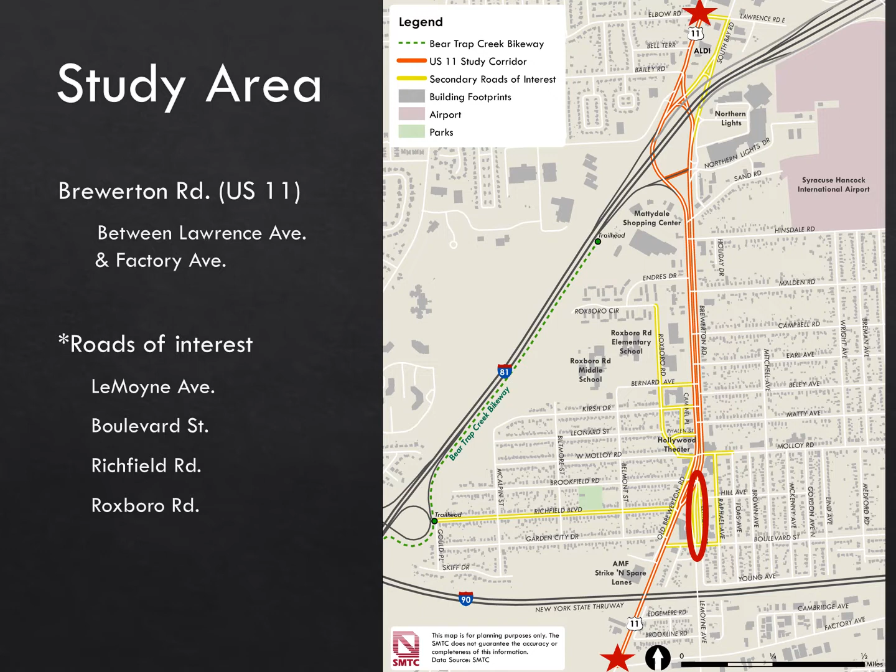The study area includes Brewerton Road from Lawrence Ave, north of I-81, to Factory Ave, south of the Thruway. Three agencies own roads within the study area. US 11 is owned by the New York State Department of Transportation. The state also owns I-81. A major road of interest is LeMoyne Ave, which is owned by the county DOT. The county also owns a few other roads in the area, and most neighborhood roads are owned by the Town of Salina.

The study provides an opportunity for the community and the agencies who own the roads to come together and envision big picture options about what the long-term future could hold. Due to ongoing public health concerns, we've opted to conduct virtual sessions for all meetings and presentations. SMTC's role is to orchestrate this effort and make a planning level determination if the ideas are reasonable to consider as big picture options, or if they should be ruled out due to some impracticality, which we refer to as a fatal flaw assessment. Ideas that pass the initial fatal flaw assessment are presented for your feedback.

Given the high-level nature of the study, many ideas may require additional vetting at an engineering level that is beyond the scope of this study. If the community chose to advance any of the ideas in the coming years, specific design and mitigation details would need to be worked out as part of subsequent design, engineering, and environmental review efforts.

For over a year, SMTC has engaged with the Study Advisory Committee. As listed, the committee is comprised of town, county, and state representatives who have authority over the various roadways. Agencies such as Centro and SOCPA also participate. Together, we have studied the US 11 corridor and have developed a few big picture ideas that we would like to share with you for your feedback. Draft concept plan options are presented later in this presentation. These ideas represent a long-term vision only. There's no proposal to build or construct anything.

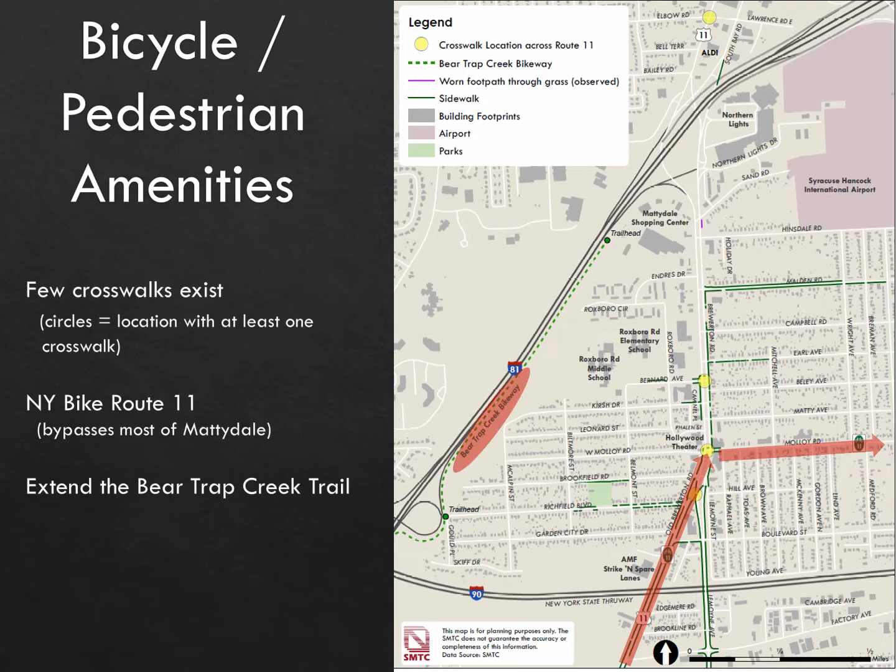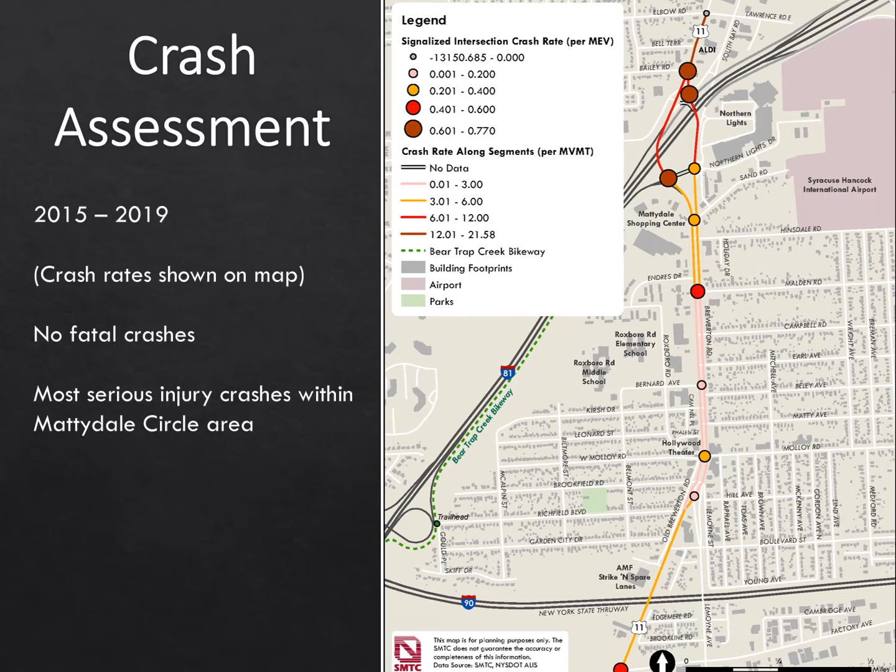along the side streets. Many businesses along Brewerton Road have closed and remained vacant throughout the years. This presents opportunities to redevelop properties or reoccupy existing buildings.

We also considered how increased vacancy rates along the corridor may have impacted traffic volumes. The map shows the most current annual average daily traffic volumes and the number of lanes by direction of travel. The current volume of around 21,000 represents a 27% decrease in volume during a recent 8-year period. This begs the question, how many travel lanes would be necessary if underutilized areas developed to their maximum potential?

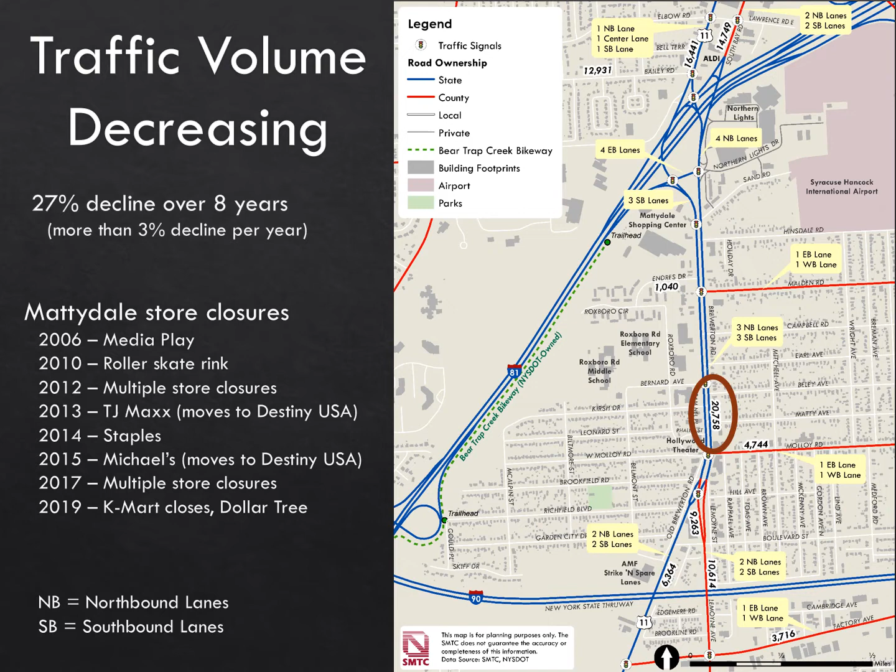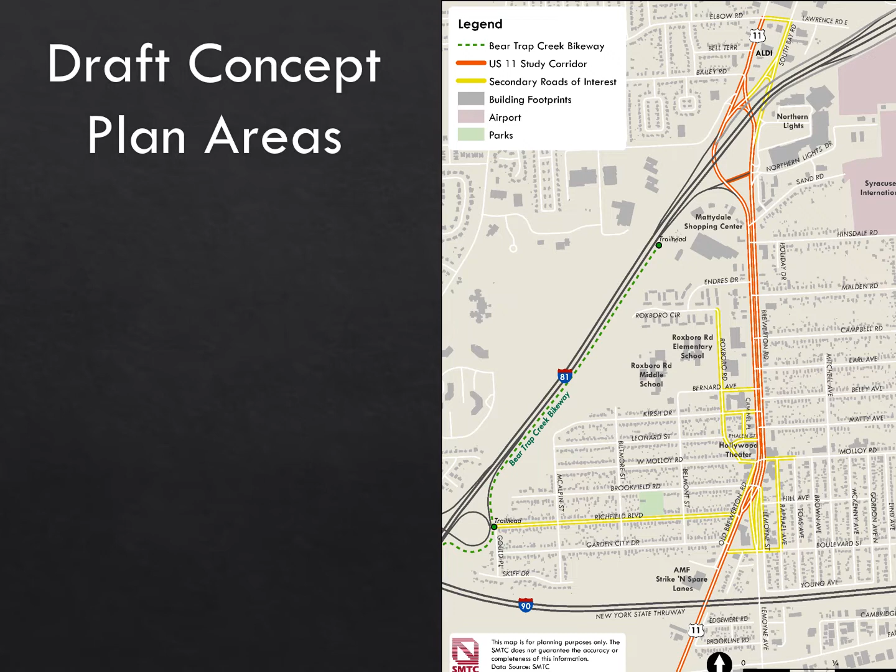The next few slides cover the fatal flaw assessment. For 3 underutilized areas, we calculated the maximum development potential based on a hypothetical zone change to R5 mixed use, which supports the envisioned town center development patterns. The 3 areas include the Mattydale Shopping Center, the former skating rink property, and the area near LeMoyne Ave and Molloy Road, which we refer to as Mattydale Commons.

We developed draft concept plans to illustrate what these areas could look like if built to their maximum potential under an R5 zone. The 4th underutilized area includes Northern Lights. We assumed that the building footprint would remain the same and that all vacant space would be fully reoccupied. We developed a concept plan that illustrates potential access and circulation improvements to the overall plaza design.

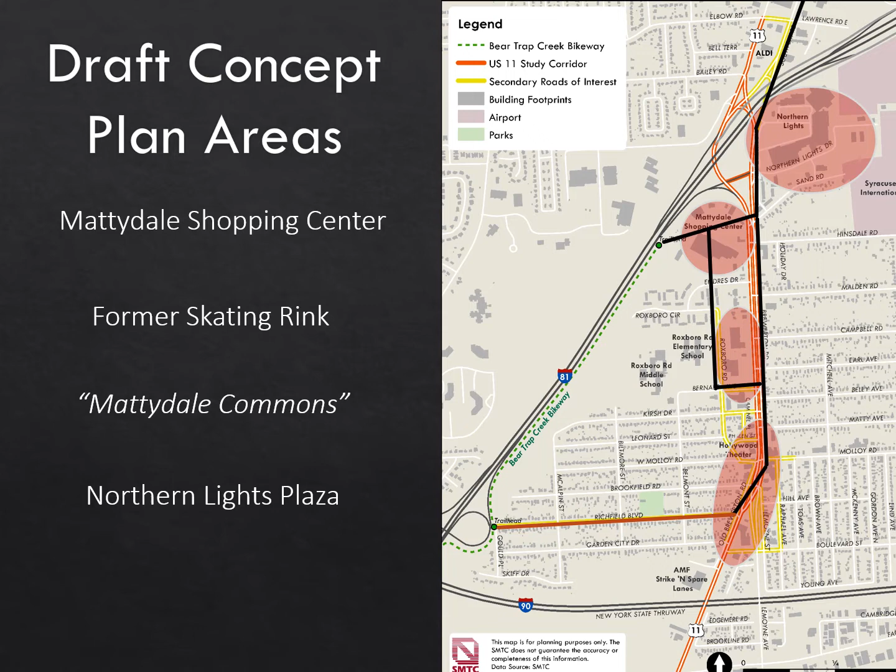Lastly, for context, we show here in black potential network extension options for the Bear Trap Creek Trail along the east side of US 11 as well as along the western side of Roxboro Road. Extending a shared use pathway along the east side of US 11 would likely be contingent on reducing a travel lane. Richfield Boulevard, in red, connects to the existing trailhead. Shared lane markings or bike lanes could be considered. More study is required to determine the feasibility for any of these ideas.

Calculating the maximum development potential for these areas, if the zoning was updated to an R5 mixed use, provides the inputs needed to run our fatal flaw assessment and develop concept plan examples. Maximum development calculations include about 160 new households and about 350,000 square feet of commercial space. This equates to about 1,000 new jobs.

Next, we use our travel demand model for our fatal flaw assessment. The model is calibrated for our region. It provides information for current conditions and future conditions for the year 2050. To assess development impacts on the road system, the model requires 2 additional inputs, the number of new jobs and the number of new households. The model can then forecast the percent change in traffic volume and the VC ratio. This information will tell us how much of the roadway's capacity is likely to be utilized in the future.

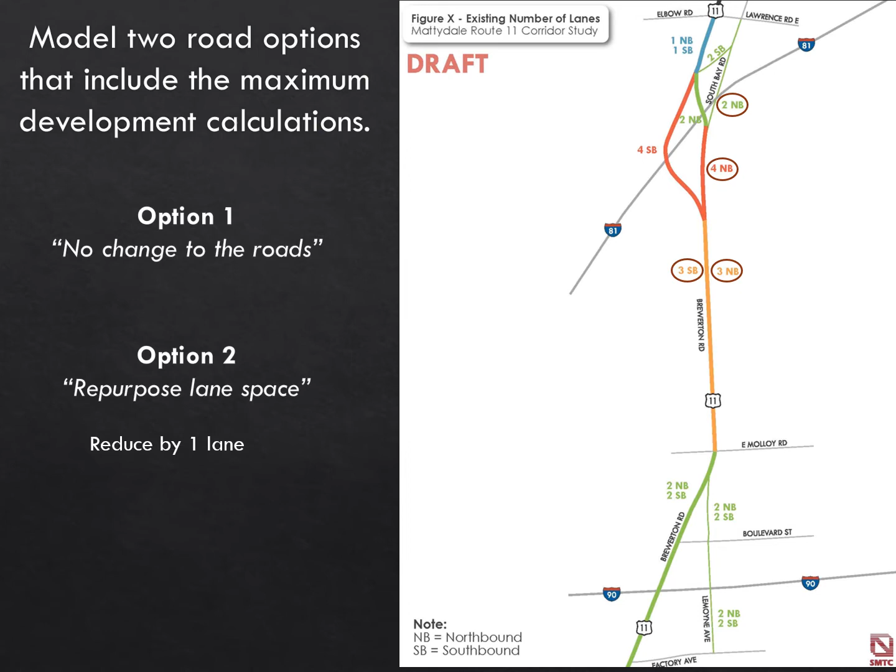The model can also assess big picture changes to the road system. We assess 2 road options that include the maximum development potential. The first road option is to keep all roads the same. This would maintain the same number of travel lanes as shown on the map. The second option is to reduce US 11 by 1 lane in each direction for these circled locations, and to redirect LeMoyne Ave to US 11 via Boulevard Street. This would open the area as indicated by the X for new development.

We included the maximum development calculations and wanted to know how much traffic would increase by the year 2050 for the evening peak hour under both road options. If US 11 and LeMoyne remain the same under option 1, future 2050 results indicate that traffic will increase 5 to 10% along both roads, and that less than 33% of the capacity will be used along both roads.

Next, we compared the future results for option 1 against the future results for option 2. Again, option 2 repurposes one lane in each direction for other enhancements along US 11 and redirects LeMoyne to US 11 via Boulevard Street to open land for development. Under option 2, traffic volumes decrease along US 11 and LeMoyne. For US 11, traffic decreases by 10 to 20% and less than 35% of US 11's capacity is used. For LeMoyne, south of Boulevard Street, traffic decreases as much as 50% and less than 20% of LeMoyne's capacity is used.

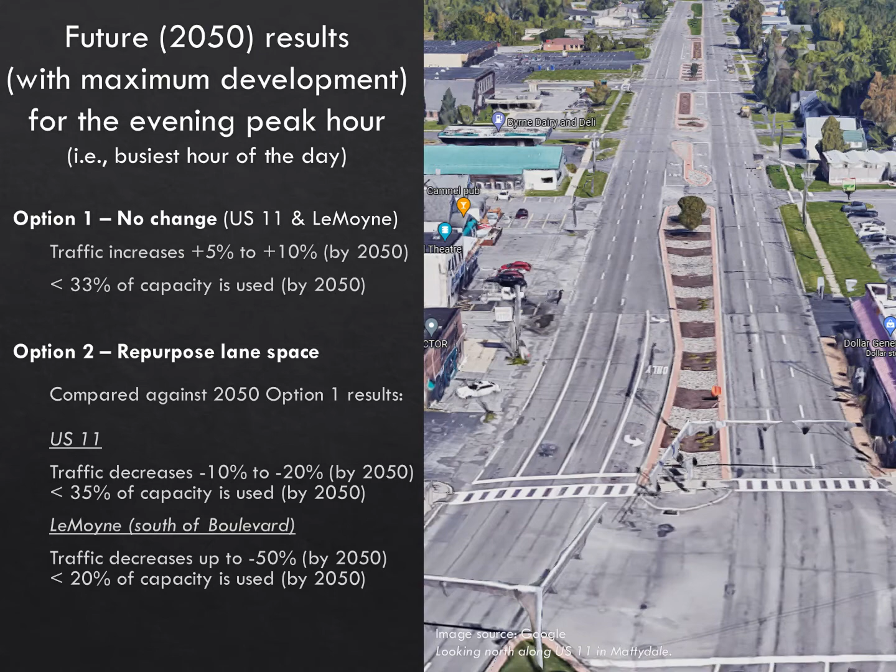As mentioned, under option 2, the model shows traffic volumes decreasing along US 11 and LeMoyne Ave within the study area compared to option 1. Interestingly, the model indicates that the decrease will include more than just the new traffic associated with the envisioned development. This suggests that there is a lot of cut-through traffic that currently travels along both roads, which does not originate or stop within Mattydale. Some traffic may find it more desirable to take another route if lanes along US 11 and LeMoyne are repurposed for other enhancements.

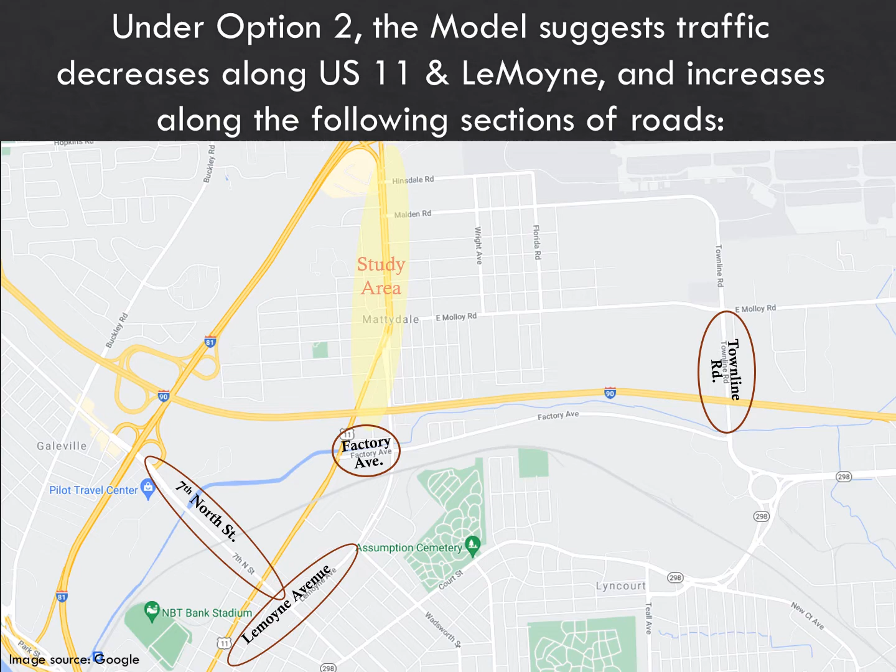The model results indicate that, even at maximum development, there's likely to be significant roadway capacity available under both road scenarios. This is a high-level, corridor-wide fatal flaw assessment. An additional study at an engineering level is required to address specific details. However, as a planning-level study, the model's results suggest that it is not unreasonable to consider both road scenarios as potential options, and that maximizing development potential is not dependent on keeping the same number of lanes.

The 4 concept plans shown in the remaining slides provide big picture ideas of what things could look like and how lane space could be repurposed for other mobility enhancements, such as on-street parking, access management, bikeway and sidewalk options, extending the Bear Trap Creek Trail, and improved access to bus stops. Although some lane enhancements could occur if the number of lanes remain the same, more options may exist if some lane space becomes available for other uses. Therefore, the concepts show these additional enhancements under option 2, the repurposed lane space scenario.

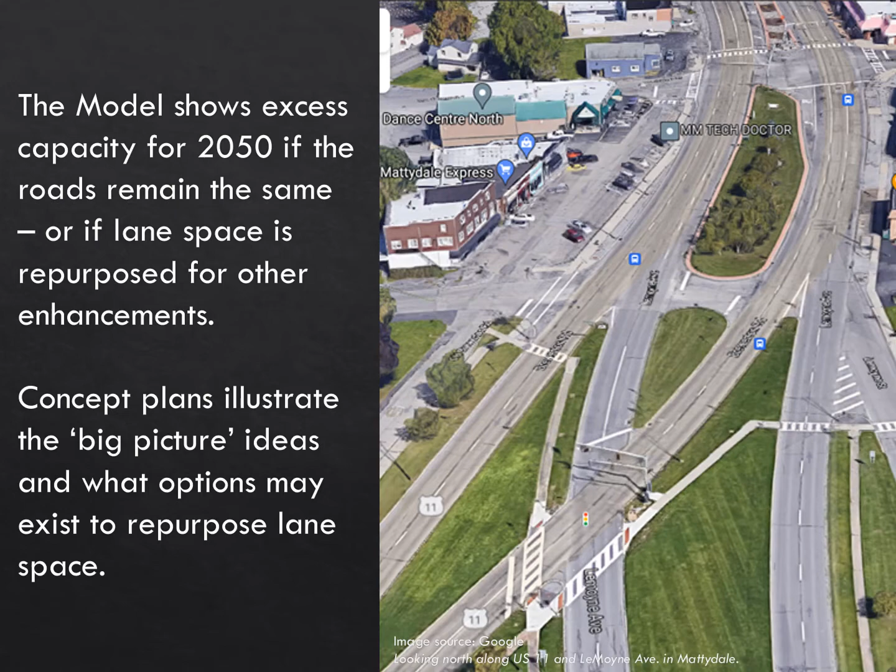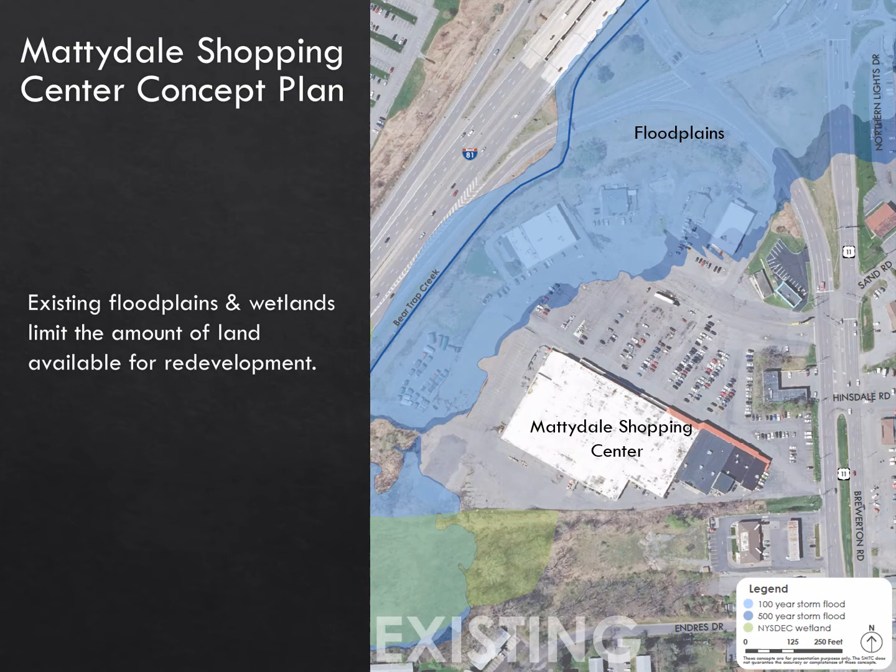As shown, some locations near the Mattydale Shopping Center are constrained by floodplains. Although the shopping center could remain the same, the town asked us to also re-envision any unconstrained floodplain areas as a town center development. The big picture idea about to be shown is a long-term concept that reflects the town's expressed vision. It's not a proposed site plan for development. As envisioned, a zone change to R5 mixed use could allow 90 new residential units and about 22,000 square feet of commercial space. Undeveloped floodplain areas could be restored to natural conditions and serve as a vegetated buffer.

The layout is a traditional 4-corner Main Street theme. The 3 dark-colored buildings have ground floor commercial and upper floor residential. The 7 light-colored buildings are apartments. On-street parking is indicated by the blue lines. Parking lots are located behind the buildings with driveways opposite each other at mid-block points for safety. A bus pull-off area along US 11 has sidewalks that connect to the site.

Sidewalks are shown as white dotted lines throughout the site and along US 11. Stop bar and crosswalk locations are shown. The Bear Trap Creek Trail is shown extended to US 11 and to Endres Drive. A bike and pedestrian side path is shown along the eastern side of US 11. We'd like to know, do you like this big picture idea? Are there features that you would add or remove? Although it's not shown, one idea to enhance safety along US 11 could be to prevent left turns into and out of Hinsdale Road. How do you feel about this idea?

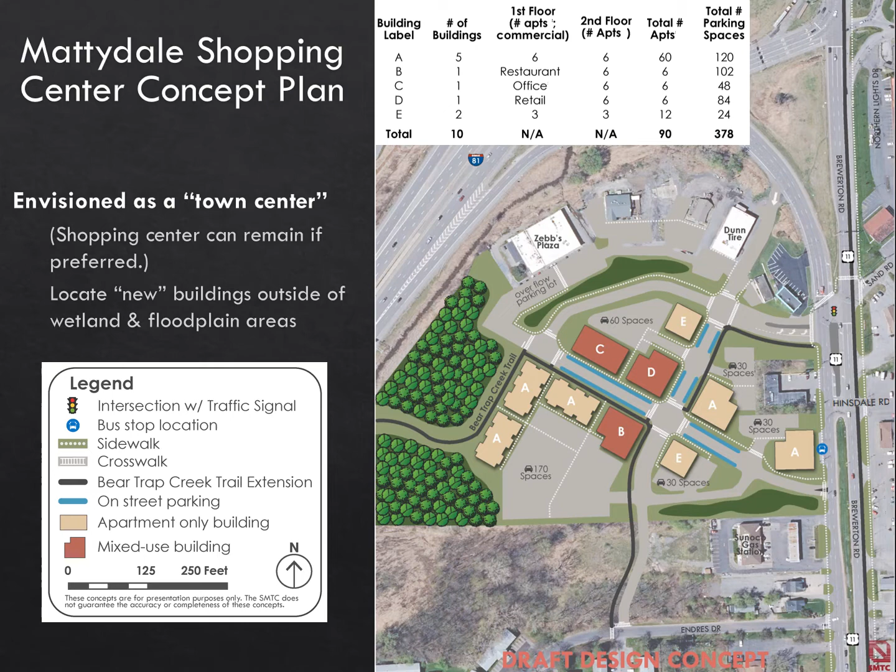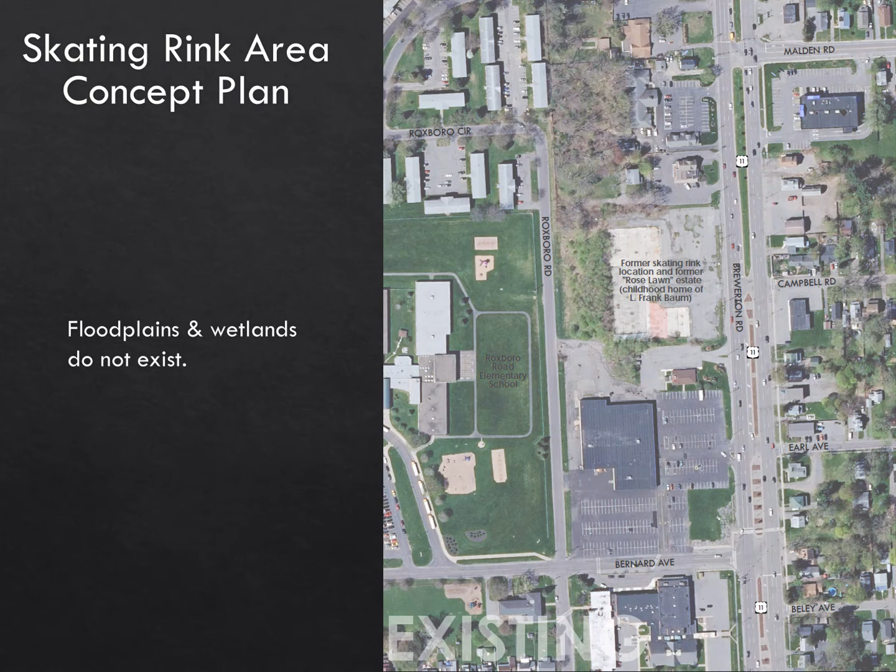Again, what is about to be shown is another long-term concept and not a proposal for development. Although Big Lots could remain the same, the town asked us to show the former skating rink location and the Big Lots as one town center theme. As envisioned, a zone change to R5 could allow 60 residential units and 36,000 square feet of commercial space. Here's a fun fact that influenced our concept. Frank Baum's boyhood home, known as Roselawn, once existed where the former skating rink building previously stood. Roselawn was a 5-acre estate surrounded by rose gardens and orchards. To celebrate our local history, we show a Roselawn-themed park surrounded by buildings that have sight lines and sidewalks in between them to entice visitation to the park.

Hemlock Ave provides access to properties. Driving north, there is no left turn into the site due to the median. Access is via Bernard Ave at the signalized intersection with US 11, from there to Roxboro Road and then to Hemlock. Another historical fact, Brewerton Road was one of the country's first plank roads, constructed of hemlock. Hemlock has a yellow hue, so it is speculated that Frank Baum used this as inspiration for the yellow brick road. As a tribute to our local history, we thought it would be fitting to show this new road as Hemlock Ave. The dark buildings along US 11 have ground floor commercial and upper floor residential.

The light-colored buildings are residential only and consist of townhomes and apartments. Sidewalks are shown as white dotted lines. 2 shared-use pathways are shown, one along the western side of Roxboro Road, the other along the east side of US 11. On-street parking is shown as blue lines, and parking lots are located behind the buildings. Do you like this big picture idea? Are there features that you would add or remove? While coming from the south to access the site, how do you feel about having to drive around the block via Bernard Ave to Roxboro Road to Hemlock Ave to access the site?

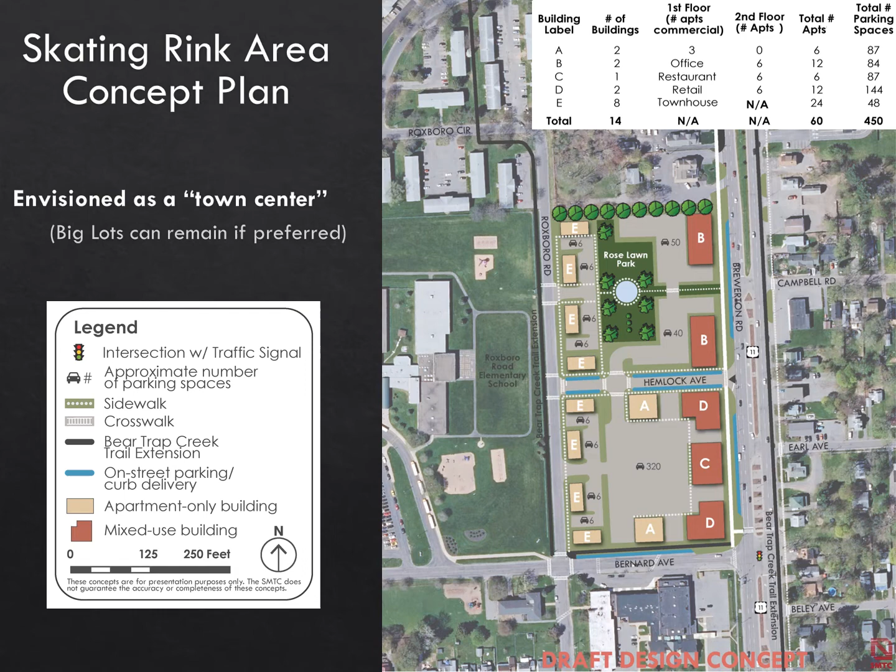The Mattydale Commons concept is the third area re-envisioned as a town center under a hypothetical zone change to R5 mixed use. As about to be shown, this concept went one step further by redirecting LeMoyne Ave to US 11 via Boulevard Street. This opens land for new development and simplifies how drivers, walkers, bicyclists, and bus riders would use US 11 in this area. However, such a change to LeMoyne would impact the county's highway network. The county DOT shared several concerns about this idea. They indicated a lot of additional detailed study would be required.

They also indicated that it may be necessary for the town to take ownership of LeMoyne Ave between Boulevard Street and Factory Ave if such a change were ever to occur. Although a lot of additional study would be required, the initial fatal flaw assessment determined that, at this point, it is not unreasonable to explore this big picture idea further. As mentioned with the other scenarios, the option always remains to keep the road network as it currently exists.

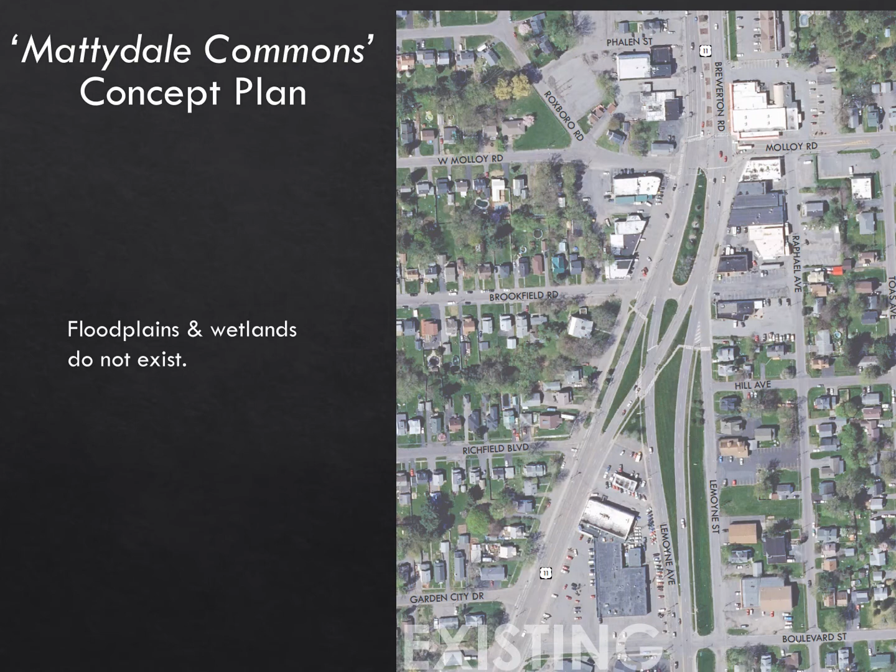Currently, US 11 is 6 lanes wide north of Brookfield and 4 lanes wide to the south. As shown, US 11 would become 4 lanes wide throughout this area. One idea shown is to potentially extend US 11's center median across from Brookfield. This could improve traffic flow and safety along US 11.

Crosswalks are shown to allow people to visit the community memorial in the center median. However, extending the median would prohibit left turns into and out of Brookfield. How do you feel about extending the median at this location?

Also, redirecting LeMoyne Ave allows space to be repurposed for up to 6 new residential units and 7,200 square feet of commercial space. This is shown as 3 new mixed-use buildings labeled A, B, and C. The 3 new buildings would front US 11 with parking in the rear. Their frontage aligns visually with the curved frontage of the other buildings along the same side of the street. The alignment and mixed-use design can reinforce this area as a town center.

Richfield Boulevard is shown extending across US 11 to LeMoyne Street. This could provide safer access to LeMoyne Street from US 11. To prevent drivers from cutting through the neighborhood, LeMoyne Street is shown without a direct connection to US 11. Extending Richfield also provides access to the new buildings. Do you feel that these ideas improve safety and access to LeMoyne Street?

A community park is shown east of Plaza Drive. Plaza Drive is a driveway into the Mattydale Plaza only. It would not connect to Boulevard Street at LeMoyne Ave. New sidewalks are shown throughout the concept as white dots. On-street parking is shown as blue lines north of Molloy.

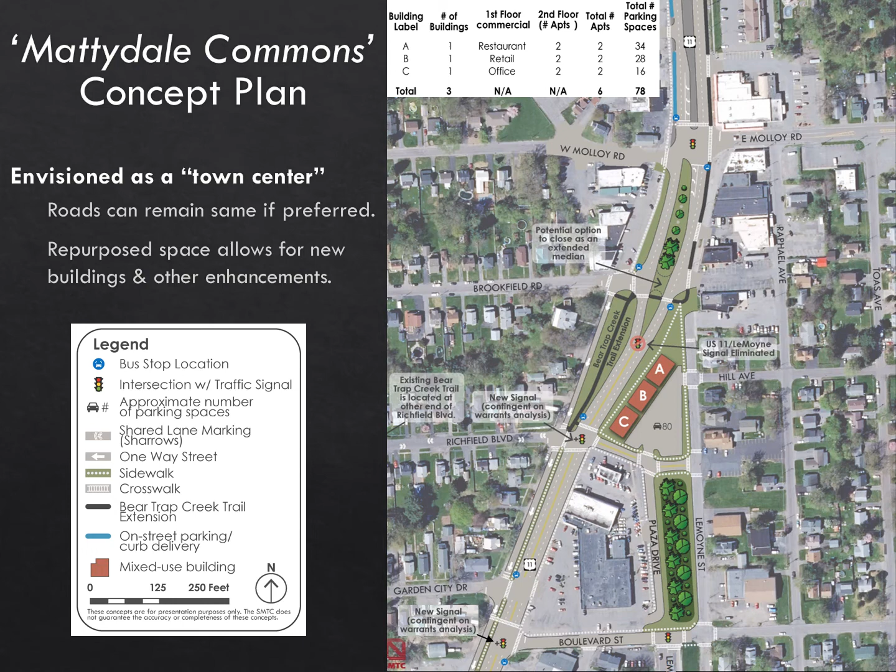Lastly, the Bear Trap Creek Trail has an existing trailhead at Richfield Boulevard. Richfield is shown with sharrows to accommodate bikes and to direct trail users to US 11. A new shared-use path is shown extending north from Richfield at US 11. The pathway would cross at Brookfield and continue north along the corridor's east side. Overall, what do you think about this concept plan?

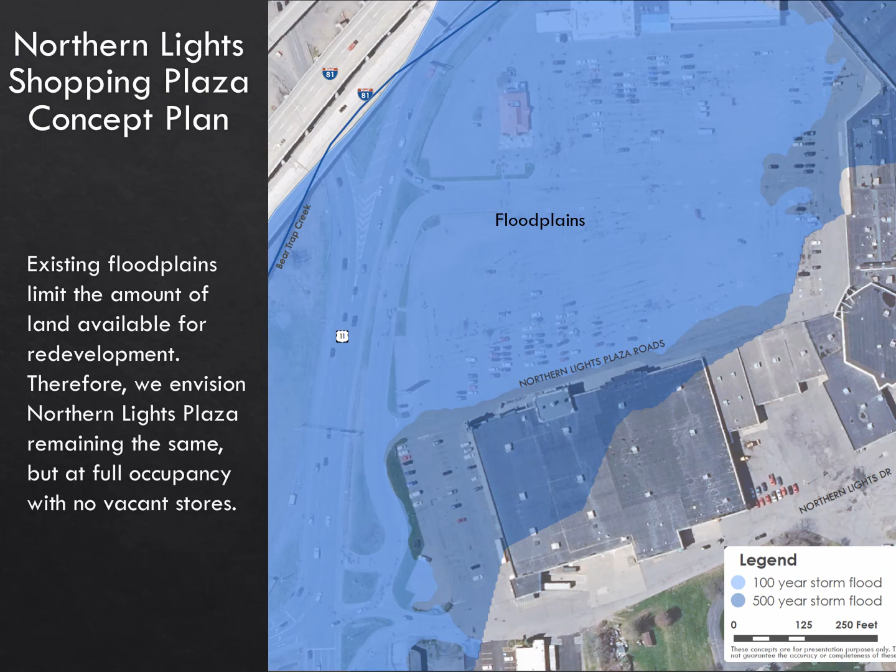Lastly, due to floodplain constraints, we envision the Northern Lights Plaza remaining the same, but at full occupancy with no vacant stores. The long-term concept about to be shown is not a proposal to make changes, nor does it have to occur as the buildings already exist. This concept shows one big picture idea about how access to and throughout the property could be enhanced. Green space could be incorporated along US 11 and used for landscaping and stormwater retention, which would create a water feature next to the plaza.

The internal road network directs the flow of vehicle and bus traffic, and the bus stop would remain within the plaza. Parking lots could be encircled by green space as shown. An extensive sidewalk network, shown as white dots, directs walkers to crosswalks, which are shown as white lines. The Bear Trap Creek Trail extends along the eastern side of US 11 and extends under I-81 into the town of Clay. Reducing a travel lane may make this potentially feasible, but additional study is required.

Site access at the existing signal shows one inbound lane and two right turn outbound lanes. This too would require additional future study. The rightmost outbound lane could direct drivers to South Bay Road into the I-81 northbound on-ramp, while the leftmost turn lane could direct drivers north along US 11, which also allows them to eventually loop back to the south under I-81 and connect to the I-81 southbound lanes. The loss of existing parking spaces is one trade-off to this type of idea. Overall, we'd like to know what you think about this big picture concept.

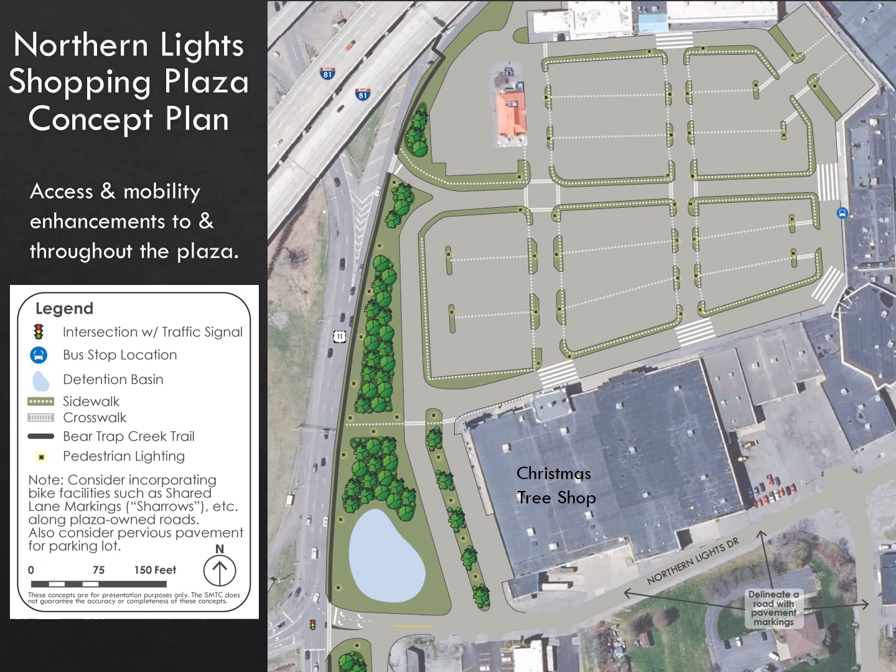This planning process brainstorms a long-term vision for the corridor. The big picture ideas presented have passed an initial fatal flaw assessment, yet many would require additional study. There is no proposal to build or construct anything. Our intent is to generate discussions about ideas to spur public and private investment along the corridor. As a long-term vision, we would like to know what you think about these various ideas.